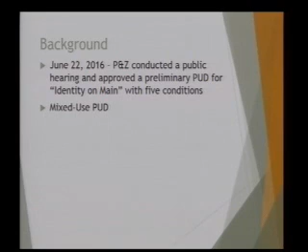The Commission conducted a public hearing and approved Identity on Main with 5 conditions. It was a mixed-use planned unit development, containing 154 multifamily residential units as part of the preliminary PUD, including 5 residential buildings and a separate commercial building 3,000 square feet in size, on the old Domino's Pizza and Sharp Oil property.

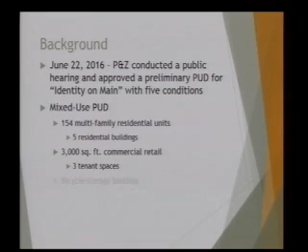That commercial building included 3 tenant spaces, and there was also a bicycle storage facility included as part of the preliminary PUD.

Also included was a substantial automobile reduction, as the applicant submitted a parking mitigation plan that included short and long-term bicycle parking. They had short-term racks scattered throughout the development, plus the dedicated bicycle storage building, and some storage within the corridors of the proposed residential buildings.

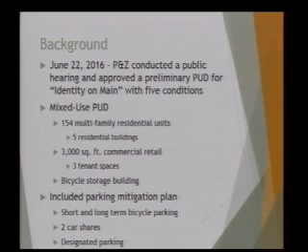Also part of the parking mitigation plan was a proposal initially for 1 car share. The Commission's condition required 2 car shares as part of this development, similar to the Zipcars seen at both campuses in town. Designated parking was also included, with applicants indicating they would rent parking spaces to tenants of the development.

The conditions P&Z imposed included that the applicant provide 2 car share vehicles on site, and that usage be tracked. There was some resistance to providing 2 cars, as the developer indicated it could be a challenge to get a company to dedicate 2 cars to this project, so they initially proposed just 1.

Staff recommended 2, and the Commission ended up imposing the condition for 2 car shares, with the requirement that usage be reviewed and tracked by staff through submitted reports. Two years after the certificate of occupancy, staff can review usage and determine whether to allow the number of car share vehicles to be reduced based on documented usage.

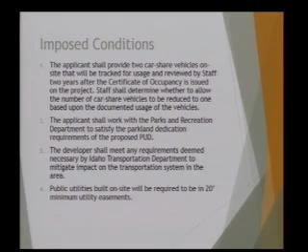The second condition was that the applicant work with the Parks and Rec Department to satisfy the parkland dedication requirements of the PUD. Third was that any mitigation required by the Idaho Transportation Department be completed. Fourth concerned public utilities—the water and sewer mains—which Public Works requires to be in minimum width easements, so Public Works just needed to verify that.

The last condition concerned a public water main for fire suppression on the site. Sometimes that connection needs to be looped for water quality and redundancy purposes, and Public Works is currently monitoring that, running it through a modeling system to verify whether it needs to be looped. All indications say it will need to be looped through the development, so they're planning on making those changes.

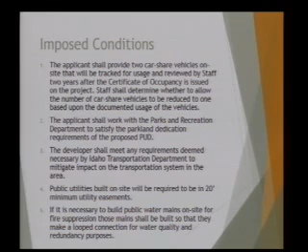Earlier in March, on the 3rd, the applicant submitted the final PUD to be reviewed by Planning and Zoning. As a reminder, the final PUD is intended to give the Commission an opportunity to determine whether the proposed development conforms to the intents of the preliminary approvals and the required conditions that were imposed, those 5 conditions, and also to provide more detail as the project evolves through construction drawings.

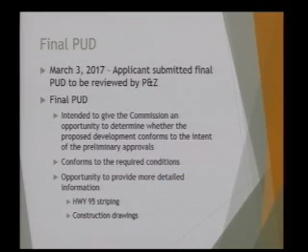We had some more information on Highway 95 striping. There was some discussion about what that was going to do. There was going to be a southbound left-hand turn lane required as part of the improvements to 95, and there was some concern the highway curb line was going to have to be widened in that area. So we've got more information on that, as well as more detailed construction drawings which show some topographical constraints and other constraints on the site that affect the design slightly.

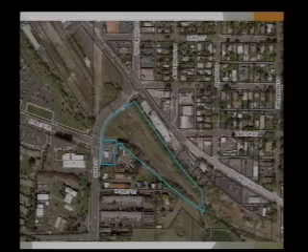This is the property, about 6 acres in size, highlighted in blue on your screen. You've got Main Street, Highway 95, Troy Highway running southeast here. Paradise Path goes through the property, and all this vegetation is Paradise Creek, which ends up going under the highway and through the Legacy Crossing area. Sweet Avenue is directly across the street with the University of Idaho campus.

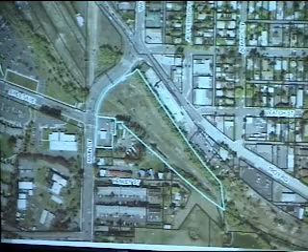Just a closer view of the property. This is the old Domino's Pizza property here.

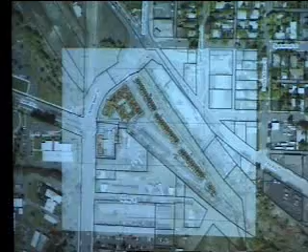This was the preliminary PUD site plan that was submitted, and we transposed that onto the area to get an idea of how it's going to fit in with the surrounding properties. This was just a plan view of the site plan that was submitted.

This was the site plan submitted for the final PUD. You can see a little bit of a modification to Building A here. They had an entryway corridor that accessed the courtyard via the south originally, but they amended that slightly, so access is going to be off of that southeast corner. Overall, it retains the basic shape of what it was originally designed.

You see the 3 townhouse-style buildings, B, C, and D, located along the path. Previously there was what they were calling Building E, which was kind of just shoehorned into what looks like a landscape area, and only contained 3 5-bedroom units.

With the new site plan, you can see there's a pretty substantial retaining wall that begins right here. There's quite a bit of slope as you head to the south, so they needed to retain that slope, which actually goes onto the property. The retaining wall goes from about 3 feet on the western side and increases to about 10 feet over here. So there's a modification that needed to happen with this parking.

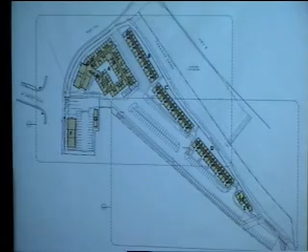They originally, just viewing it as a flat lot, had parking all the way out to this southeastern portion of the property. With the inclusion of that retaining wall, they had to reconfigure that a bit in order to put the wall in and shift some of that parking to the north side. So with the wall they had to put there, they shifted the parking to the north and eliminated Building E as part of that, ending up gaining a few more parking spaces than what they lost from that southeastern corner.

That was one of the more significant modifications to the plan. Everything else is as they had originally submitted it.

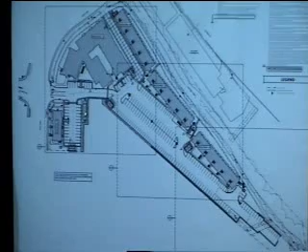They have some more detail on dumpster locations, various dumpsters throughout the development. Those had to be slightly canted in order to satisfy LSI requirements for having a garbage truck go through the property. They had to add one over here for the commercial development. The 3,000-square-foot commercial space has been reduced slightly, to around 2,900 square feet, but it's pretty much the same footprint and floor plan that was submitted originally. They still have the bicycle storage building there. So those are the primary changes that have happened.

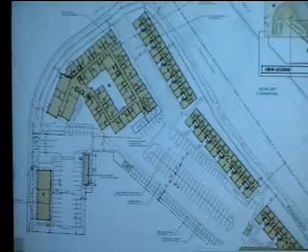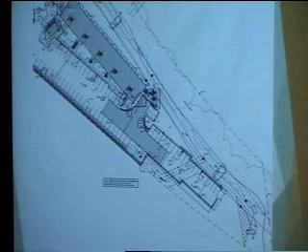Southeast side of the development. This really hasn't changed much. They have, like I mentioned before, the refuse area for the dumpster, which has just changed slightly there, but everything else has for the most part remained the same. This is the southeast corner where we have that retaining wall that's required, and then the changes in the plans with removal of building E.

Just a tiny little question. Do you think we're going to be able to keep the path open during construction? Has that been discussed at all?

Well, it hasn't been discussed, but I would imagine... I want to watch it being built, and of course I need to be on the path.

Yeah, I mean, they should be able to keep it open. They'll have to, anytime we have a sidewalk or road closure, submit a permit in order to do that, and part of that needs to include some type of detour for mitigation. I think they'll probably go one building at a time, and I'm sure we can work around it somehow.

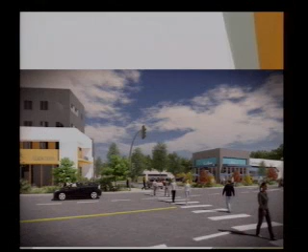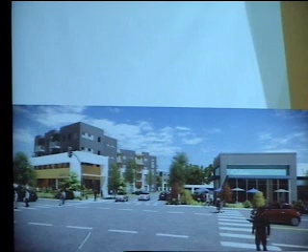So this is from the Sweet Avenue intersection with 95, looking northeast, that would be the commercial, 3,000 square foot commercial component. This is building A that you're looking at. They've got the leasing office on the ground floor, and then residential behind and above. Kind of an overview looking to the northeast.

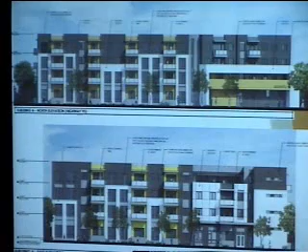And then these were the conceptual elevations that they had submitted for the preliminary PUD, and these are the elevations for the final. The buildings essentially remain the same. The only modification—they have the same color palette and everything. These are just in black and white what they submitted with the construction drawings, but they'll have the same color palette as these preliminary PUD elevations.

The only thing I was able to identify that's changed were the balconies on some of these. On the 95 side, they have still retained all the balconies. So when you're going street side, heading northbound on North Main or South Main, that elevation will still have all the balconies, as well as that southwest corner above the leasing office. Then as you go to the private drive that leads to the east part of the development, that's proposed to have some awnings and features, but they've removed at least some of the balconies in this elevation and continued those on the east and north elevation. So there's at least one elevation where they've removed those.

I think the developer had indicated they'd run into some issues in the past with balconies, and I think it primarily has to do with students—college students and balconies—and I think that was the primary reason. I think he had planned to make some changes with the balconies on the project.

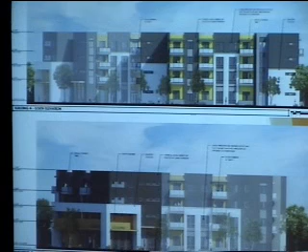And then this is looking at the leasing office, so this would be the drive that leads back to the parking area and the parking in front, and this would be the same elevation there, just a different angle. And then the buildings, for the most part, are the same—it's just that the balconies on this side have been removed.

One thing that's odd is if that's the southwest elevation, for green building purposes you want the shading that balconies offer to fenestration more on the southwest side than on the north. So I guess I would question the logic behind that. Yeah, and this would be more, I guess, southeast—the building.

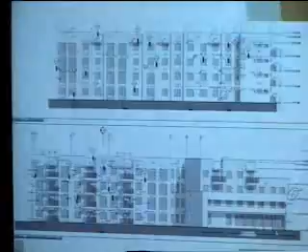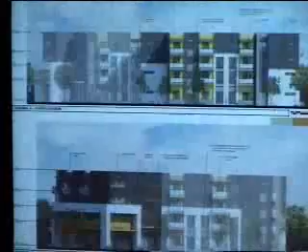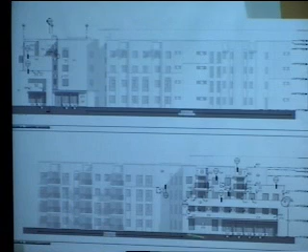It says southwest on the label, but I think it's intended to be this elevation here, because you have the main entrance to the development. And then this is, I think, southwest here, so this would be along Main Street. You can view the leasing office here, and then this is the portion that still has the balconies.

So they must have the elevations mislabeled by compass direction or something? 'Cause that says northwest to south. I noticed that with the architect before, that they had, just because of the overall angle of the buildings, it was more of— because you have north, it's really at this angle, and then it's kind of cocked on the site in an odd fashion, so when they were labeling it, it kind of made sense when you looked at it, but they were getting that off a little bit on their labels.

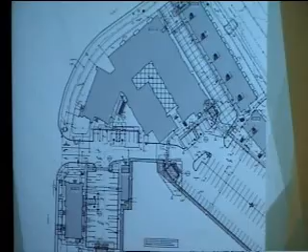It's at such an angle, so they have noted that it's like the Highway 95 elevation or the Highway 8 elevation is a better way to do it, because it's not easy, and it's such an unusual site that it doesn't seem like part of the grid at all.

So looking at the Building A floor plan, we have the leasing office, a fitness center, lounge, study room, and then numerous residential units. There's about 91 that were identified in the preliminary PUD floor plan.

They were broken down into quite a few one-bedroom units, so 25 of those. They had 57 two-bedroom units, and then a handful of three-bedroom and four-bedroom units to round that out. They had shifted that around a little bit in this final PUD, so they've reduced the number of units, but increased the bedrooms in those units.

So they went from 91 to 72, but the mixture is quite a bit different. They have 13 one-bedrooms, so they about cut those in half; reduced the two-bedrooms by about a third, so they went from 57 to 31. Three-bedrooms increased those to 7 from 2. And then four-bedrooms about doubled, from 7 went to 14.

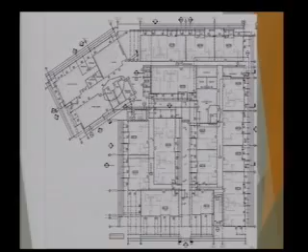So this was the floor plan that was originally submitted. It was the ground floor of Building A. You can see it's fairly well stayed the same. You have the same arrangement of leasing office, fitness center, and study area there. And then you have the internal hallways that make a U around the first floor, surrounded by a mixture of units on either side of the hallways. Elevators are in the main lobby there.

So pretty much the same, except we have that change in where the corridor is for the courtyard, which enters from the south, where it was previously going through that west, or I guess the south side is what it would be. And it changed to the east, entering here.

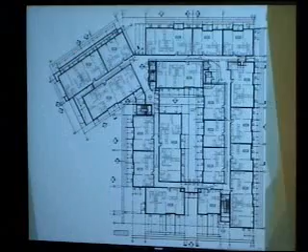So the second floor, pretty much the same. It's going to be pretty much the same except for just the mixture of number of bedrooms within the units, with the exception of just the entrance to the courtyard on the east side.

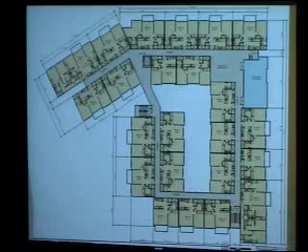And it looks like they previously had some type of rooftop patio space on the 3rd floor. That's also been removed as part of this plan, and they replaced that with a dwelling unit.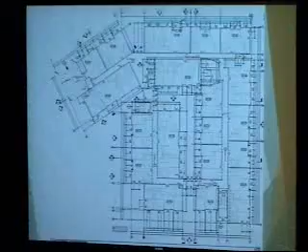These are the townhouse style buildings, B, C, and D. These buildings have pretty much stayed the same, so there hasn't really been any changes. I think the only change was on the south side that abuts the parking lot—they had this external stairwell, you can see the railings in between, and they've just enclosed that on this side. So what was previously this open area, you can see that they've enclosed it just on the south side. But the north elevation that's adjacent to the path has largely remained the same.

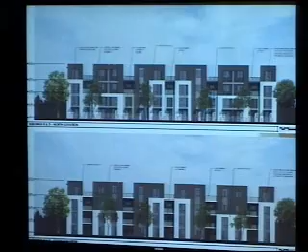So that's that elevation there, and that was what was originally submitted. They'll have the same color palette and everything.

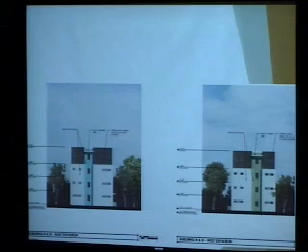These buildings have pretty much stayed the same. These are the ends of those units that were portrayed at the preliminary PUD, and those have virtually stayed the same as well. I don't think there's been any changes on those.

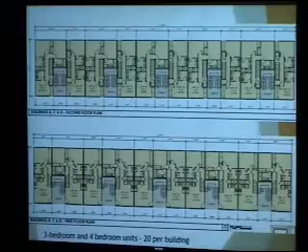And then the floor plans, there was originally 3-bedroom and 4-bedroom units, and 20 units per building. That's remained the same as well, so they just have a mixture of 3 and 4 bed units, 20 per building, 4 stories. And then this was what was formerly Building E, that 5-bedroom unit building at the southeast corner, and this is the building that's been removed.

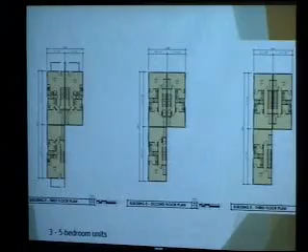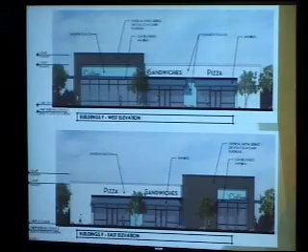And this has virtually stayed the same as well. So really no changes, slight modification to the square footage, but it was just really minimal, and that was just to account for, I think, a more accurate analysis of what the square footage was with all the facade articulations.

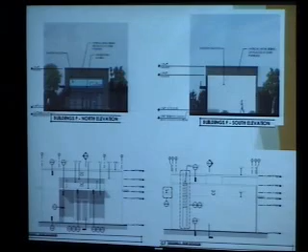The floor plan that was submitted preliminarily has remained the same as well. And I don't believe they originally had an elevation for the bike parking building, so this is just what was submitted for that.

You can see all the bike parking contained on the inside of it, up against the wall. So they've got some vertical hangers here, and then they've got some horizontal ones that are stacked right on top of each other as part of their system. I think they've got about 150 spaces within this building for long-term bike storage.

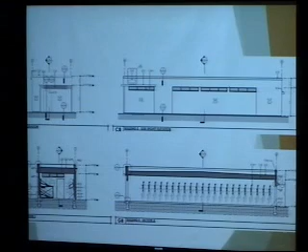Brings us to the landscape plan. So these were just landscape plans that were submitted. I think they had hired a landscape architect out of California to put these together.

And then once everything went through the preliminary PUD stage, they ended up contracting with Pat O'Connell, who's here to answer any questions, to get a landscape plan that actually has landscaping and trees and shrubs and ground cover that's available in this area, because a lot of the plantings they specify in these plans are hard to get around here or don't do well with our climate. So they hired Pat to do a plan as well, and a large portion of it revolves around just xeriscaping.

So this is the plan that he submitted. Actually, probably quite a bit more plants as part of this plan.

So there really hasn't been that substantial of changes. There are buffers that were on the south, and we have that retaining wall picking up here. He's indicated there will be some type of covering on that, like ivy that will grow up onto the wall. But obviously we can't put shrubs on top of a retaining wall, so that would be pretty much the major change, other than just swapping out all the plantings shown here with ones found within our area.

I have a question about that, Mike, since we're working on parking lot standards and landscaping, and we aren't completely through that process. How would that impact this development proposal if we were to work our parking lot landscaping standards through the system?

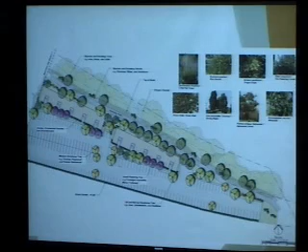Could you clarify where the old growth trees are? They're on the adjacent property - Chuck Bond's property. They're all along the south side, right along this area right here.

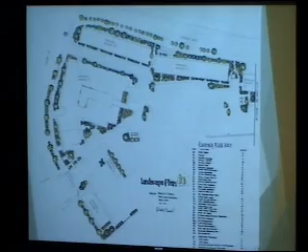Would our landscaper like to make a comment at all about what you see here in the project?

Can you hear me from here? You gotta come up here. It's open. Are we having a hearing? Yeah. I didn't realize it was a hearing, I misunderstood. Well, usually Mike presents first, so that's fine. I'm sorry, I was mixed up on that.

For those that don't know me, I'm Pat O'Connell. I've been doing this since like 1977 in town.

So the understanding at first was we were talking about buffering that retaining wall, but with the process of the parking lot, there's not really a planter between the end of the pavement and the beginning of the retaining wall. There's also going to be a fence on some of that retaining wall, so in terms of any landscaping, I don't know how much would really be viewable.

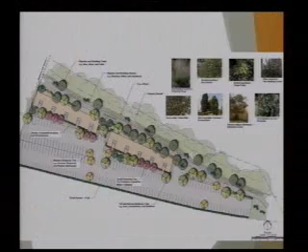I put a couple Amur maples up there. Once we get them going, like the first or second year, they'll be able to handle that drought tolerance, so we could probably even run a couple drip lines up to it. We were talking about ivy up there first, but the owner didn't really like that - he didn't want people's dogs eating on it or whatever. I never knew it to be a problem, but we could probably put maybe blue rug juniper above the wall, because it will cascade quite nicely if there's a concern about it being too massive.

In terms of the vegetation, it looks like a lot, but I had to get all the overstory, mid-story, shrubs, ground cover, everything. So I like to plant in a relationship. Say all the trees are going to be a columnar type, like all the major trees—capital pear, bowhall maple, columnar hornbeam—things that are going to stay within the planter.

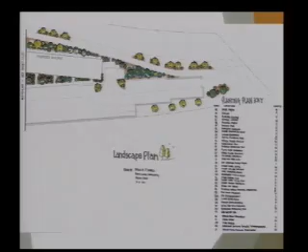That isn't a city code requirement that they have a plan. No, but could you go to the last slide? Right there, where those plantings are to the very right, if you look at the parking lot, there's just a break right there. That whole area where Building E was going to be could be a snow dumping area. Yeah, I'd imagine they'd probably end up piling it in that corner, pushing it all the way and piling it up on the east side.

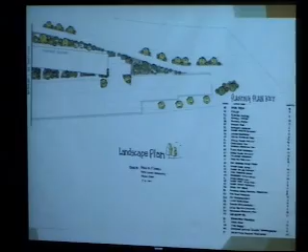So I had a couple quick questions for Kurt. One's just my own curiosity.

So what is the looped water main? What does that mean, actually, exactly? Well, a lot of times to serve a development, they'll tee off of the city main on 95, and that main needs to be sized correctly since it has to be a city main with an easement for it. Oftentimes they'll tee off the main on 95 and run private lines off the city main on the property. But in this case, they have to create a loop that ties back out with the main on 95, so it'll be like a horseshoe loop. It'll probably follow the path or the drive aisle design, coming in from here, looping around, and ending up going back out and tying back in with the main.

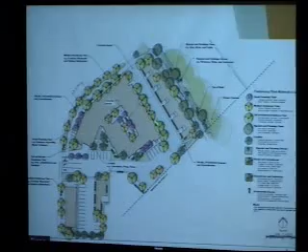You guys have seen this before, but I'm trying to get my head around how 2 Zipcars and bike racks can justify a 47% reduction in parking. Fair question. It came up in the last hearing, and it's a leap of faith, in a sense, of a cultural change given the site's proximity to campus, and it's somewhat of an experiment.

But do we see other property owners coming back and saying, hey, I'm going to provide 2 Zipcars and some bike racks and build more? Yeah, I mean, they certainly have that option. So they went through a PUD in order to achieve this parking mitigation plan, that was part of the reason.

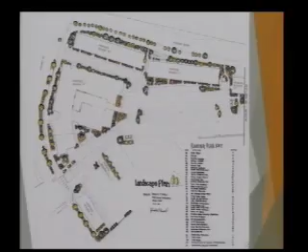But you look at the area they're at, directly across from the University of Idaho campus, so this is more of a development driven toward U of I students. You have Legacy Crossing directly across the street, where there's a 50% reduction in parking if you were to develop there. You also have a comp plan designation of urban mixed, which calls for a reduction in parking to create more of an urban feel, since this area is so close to downtown and the university. It was really the intention to promote urban development, and one of the restrictions to doing that is surface parking. That's why in Legacy Crossing we have no parking requirement for retail and restaurant uses, but residential requires parking, at a 50% reduction from what would normally be required.

So looking at it, there's always a potential for overflow onto adjacent neighborhoods, that's always a concern. In this scenario, it's kind of isolated because you've got 95 on the west side, the creek, and Highway 8 on the north side. You have other apartment complexes that could potentially be affected if overflow parking occurred in their lots, but the next adjacent street is Henley Street, about a block up across from Sunset Mart. So a lot of this is the developer taking their own risk for not providing the parking their tenants might like to see, accepting that risk of quite a bit less parking.

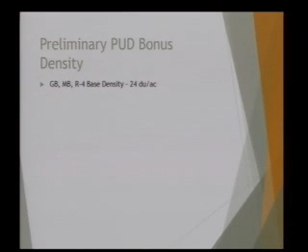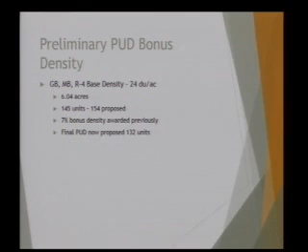As you recall, we had the PUD bonus density here, and it was previously at 24 dwelling units per acre. It has a combination of general business, motor business, and R4 zones across this particular property. It's about 6 acres in size, and that equates to 145 dwelling units as the base density. They had originally proposed 154, which required about a 7% increase or bonus density to be awarded, which the commission ended up awarding. The final PUD is now below the base density of 145, and they're coming at 132. So if they had gone through at the preliminary stage, they wouldn't have needed any type of bonus credit to achieve the density they're proposing.

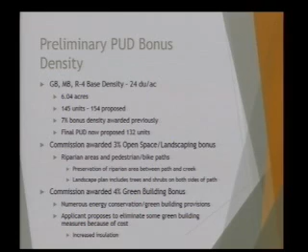So the commission awarded 3% for the additional landscaping along the path, and then they awarded 4% for green building bonuses. There was numerous energy conservation, green building provisions. They had proposed to eliminate, since they don't require a bonus anymore, they wanted to eliminate some of those. I think the insulation was coming in at a really high cost. We're at R19, R21 here, depending upon the wall or the ceiling, and in California I think that's a lesser standard. So they were just assuming that doing an R19 was going to exceed the minimum requirements. And when they were informed that that's actually the minimum here, and they had to go above that to satisfy this, they ran the numbers, and it was going to be a substantial amount for that additional insulation. That's one of the factors they're looking at, hoping the commission eliminates or allows them to eliminate.

Sorry, breaking in with a brief question here. So most of the insulation they're proposing to eliminate is just the wall insulation? Yeah, I think we require R21 on the ceiling and R19 on the exterior, and they were planning on doing what we require. It's just that they were below that where they typically build in California. It probably tips it into a wider wall to get up higher, and that really ups the cost, would be my guess.

So, just so I'm clear, they're still required to meet that minimum standard, correct? We're not allowing them to do something below the minimum R19 and R21? No, we're not. Yeah, that's building code. We can't waive that. They just can't exceed it since they were already exceeding something they thought was already exceeding. Yeah, I just wanted to make sure they weren't asking us for something less than that.

Walter, yes. If I may, Mike, go on your unit count, that 132. I was doing the math here on how many bedrooms they've got. Are they counting on 2 people per bedroom? Is that the plan? I don't know that. They have a bathroom per bedroom. So does every single student get a bedroom and a bathroom? Or is it 2 people per bedroom? It's usually a single, 1 person per. Apparently the new trend. It's interesting. So you're going to have, you're counting the bedrooms.

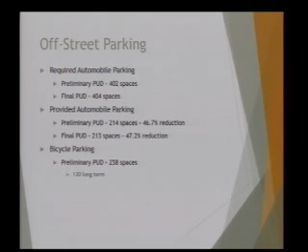Bicycle parking, preliminary, they had 258 spaces, 130 long-term and 128 short-term. The final is 262 spaces, 134 long-term and 128 short-term. So a slight increase with the bicycle parking they're providing.

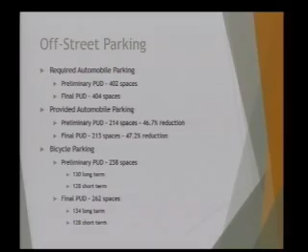I have a question about that. How many of those are covered? I know there's a bicycle building, but in addition, are the other ones racks on site, or are they covered? The long-term ones are all covered. Okay, so those are the ones located inside on the corridors, like the stairwell corridors.

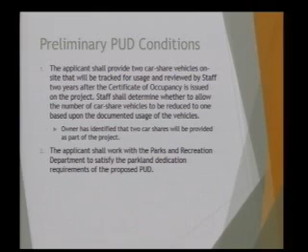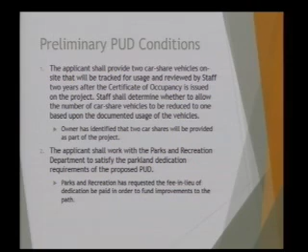So reviewing our five conditions: we had the two car shares, and they've indicated on the plans that they're providing two car shares as part of the project. We had that condition about working with Parks and Rec Department to satisfy the parkland dedication. Got a memo from Dwight Curtis, the Parks and Rec Director, saying they want to accept the fee in lieu, to work on improvements for lighting for the path. The developer needs to work with ITD to mitigate any impact to the transportation system in the area.

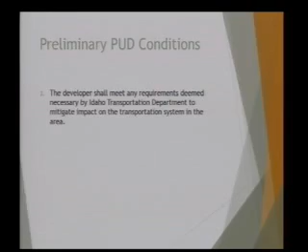There was enough width from curb to curb, so there isn't any type of modification needed to the path or sidewalk on that east side of the street. So they can restripe it, get the two northbound 12-foot lanes, two southbound 12-foot lanes, a left-hand southbound turn lane that's 11 feet wide, and a 12-foot wide dedicated right turn lane that's currently there. So they have enough space, they'll just need to restripe that, and that'll satisfy the left-hand turn southbound requirement.

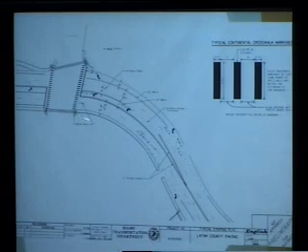So this is what their civil had drawn: you have the ingress, and then you've got the two egress with the southbound and the northbound, and then the straight through Sweet Avenue. So nothing will affect the sidewalks or the path in any way. It'll just end up shifting and taking out the portion of sidewalk on that property, and possibly relocating these utility boxes. But the arm for the light is currently on the south side and extends over, so that won't need to be relocated either.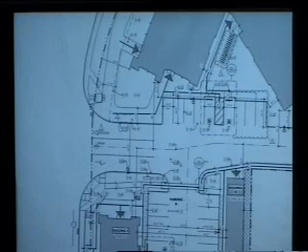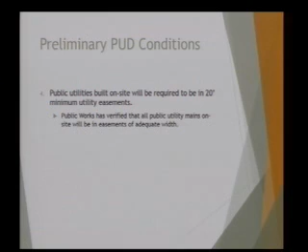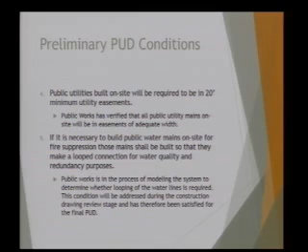And then our 4th condition was that public utilities be in those utility easements, and Public Works has verified that via the construction drawings. And then the last one about looping the water line through the development - we have a model that we've been running with our consultants and the city, and it looks like they're going to have to loop that through the development. So that's what they're planning on with the construction drawings, and Public Works has indicated that'll be satisfied.

And it brings us to staff's recommendation. With the final PUD, we've reviewed it, and in our opinion it's substantially unchanged from what was provided during the preliminary approval. It's our recommendation the Commission approve the final PUD with no conditions. I'd certainly be able to answer any questions you might have.

Just to close the loop, the original preliminary was 398 bedrooms. The new one is 397.

Are there questions or comments? No, I don't have any. Yeah, I think the only thing in my mind is the parking issue, but that's kind of a done deal.

I mean, it is - if it was smack in the middle of a regular residential neighborhood, I would think it's a disaster. I wouldn't want to be Charlie Bond. We spent a lot of time with it, and it's an intriguing issue.

I think because of the location of the unit, there aren't many easy places to just park. A few people came in and were worried about it, but because you can't get across the highway, it isn't going to be easy to just ooze out into the neighborhood. I mean, think about my own house - 6 kids rent a house across the street from me, and next thing you know there's no on-street parking because they're full every day. I don't think it's going to be easy for them to ooze over across the highway - it's going to make it really hard to get to.

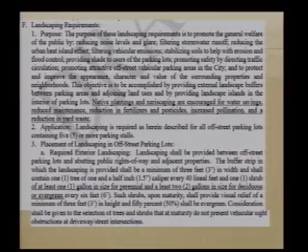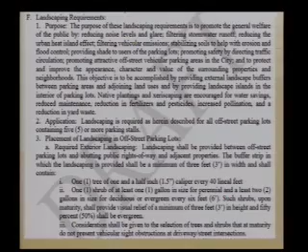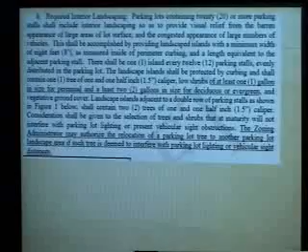So taking what we currently have with the purpose, application, and placement within exterior landscaping, I just shifted that and broke it out into bullet points, which I think is probably a lot easier to read that way. That's really the only minor change within this section. And then with the interior landscaping, we ended up with a pretty big paragraph, and once you have multiple requirements within a large paragraph, sometimes it's hard to read, and you miss some things.

So I ended up breaking that out just like the other section. What I ended up doing was changing the parking lots containing 30 or more stalls shall include interior landscaping, increasing that from the 20 that we previously had.

I wanted to put out a statement that multiple parking lots on a single piece of property are counted separately. So if you've got one at the front and one at the back, that's not one parking lot, they're 2 separate parking lots, just for clarity. Multiple parking lots on a single property are counted separately for the purpose of interior landscaping.

And then the zoning administrator may determine that parking lots that are separate but connected by travel aisles may still be counted separately for interior landscaping requirements. I put that flexibility in there so we could look at Chuck's Bond scenario, when they change directions from horizontal to vertical and they're connected by a travel aisle, to be able to make that interpretation. So I changed that, and listed these, all the same requirements, in bullet form.

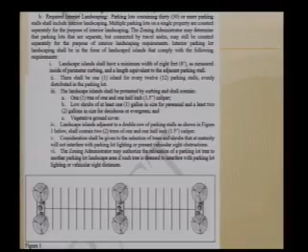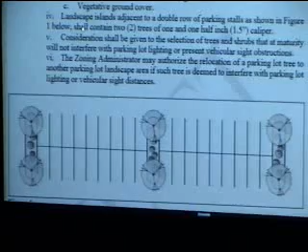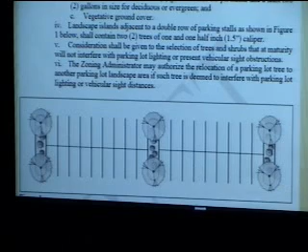And then we were working on a figure 1 to show that, referenced in subsection IV or 4 here. So landscape islands adjacent to a double row of parking stalls, as shown in figure 1 below, shall contain 2 trees of 1 1/2 inch caliper. That's just showing the diagram that we always intended. I finally had some time to put that diagram together to get an idea of what that would look like.

I think that pretty much wraps up this section, unless anybody else has any comments. I think we're pretty much wrapped up. And looking back through the section, I think it's always been a bit of a challenge for us to convey accessibility requirements.

So ADA spaces, because they're all in a separate book, they have ANSI requirements. Some of them are in a building code, some are in the ANSI book, and we just reference them. So we don't have a printout we can give people that shows what the dimensions are. Usually we're telling people what the dimensions are and hoping they get it right when we go out to inspect it. So I worked on these images to put in the code, right next to where we have our parking lot dimensional standards.

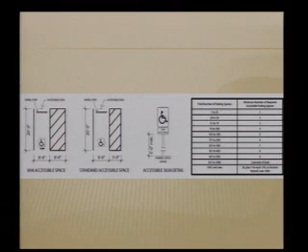This will be showing a figure that shows the van accessible space, 8-foot wide stall, 8-foot wide aisle, 20-foot deep, wheel stop, sign, and then the standard accessible stall that has a 5-foot aisle on it, and the sign diagram, because the bottom of the sign to the grade of the stall has to be a certain height and can't be below that. Oddly enough, they don't specify a maximum height, so technically you could have the thing 30 feet tall and it'd still be compliant, but they just have this minimum.

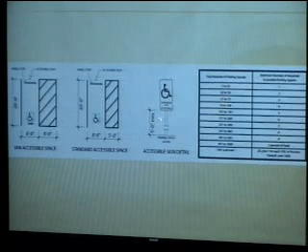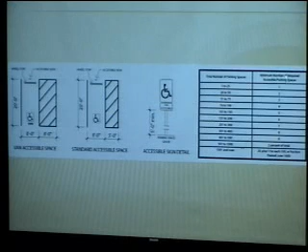So just have that diagram, and then, it's hard to see, but this is the ADA parking schedule. You're required to have one ADA spot as your first spot. So if you're required to have one stall as part of your development, it's got to be an ADA stall. This goes through stalls: if you have up to 25 on your property, you're only required to have 1 ADA space. Once you go 26 to 50, you got 2, and so on. This is pretty much straight out of the building code.

But you have these in certain areas, and they're hard to pull together and convey to people. So I think it's good just to have more pictures, and be able to hand this page out to people, so they get the requirements and could get it right the first time.

So I think we'd be making this change, and that'd be pretty much the last change, and hopefully ready to go to a public hearing on the ordinance here. I think we'll have one more draft. I need to draft the whereas statements at the beginning. But next time, I hope to have a completed ordinance. We can take one more look at it, and then hope to notice it for public hearing after that.